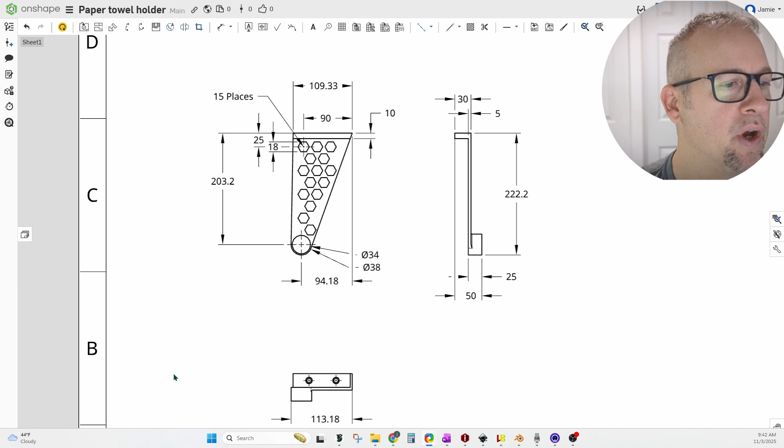And now I will go back to the Part Studio. So now let's create a brand new OnShape document. So I have my OnShape open now. I'm using the free subscription. We're going to go to Create. We're going to go to Document. We're going to type in paper towel holder. And we're going to add just a 1 to this.

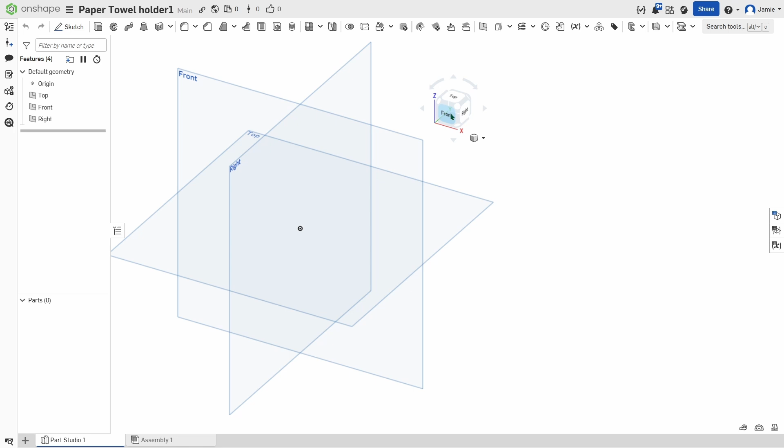Now I'm going to take this WCS, the work coordinate system, pull it in, and let's click on front. And we can click and drag this around if we want to. So now basic principles of the mouse: middle mouse button does the pan, right mouse button does a rotation, and left mouse button does the selections.

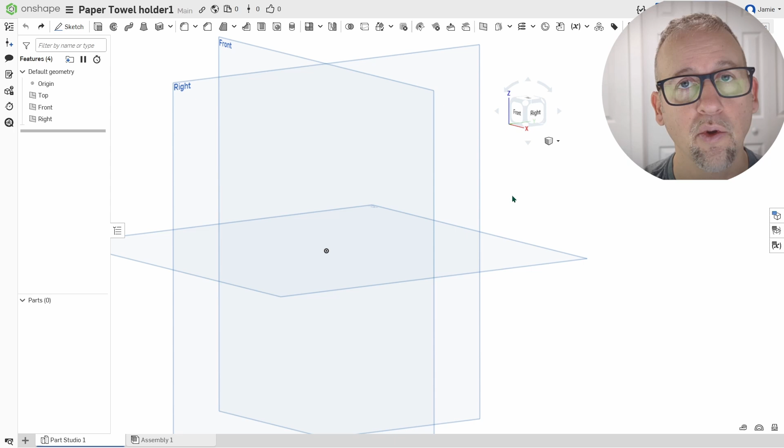We can hit Y to get out of selections, or hit Y to hide things, and so I'm going to Control Z that and undo that. That's the same as going over here and hitting this undo.

Okay, so let's go to our front plane. Let's start with our general shape. We're going to go from this origin right here. This origin is going to go to every point.

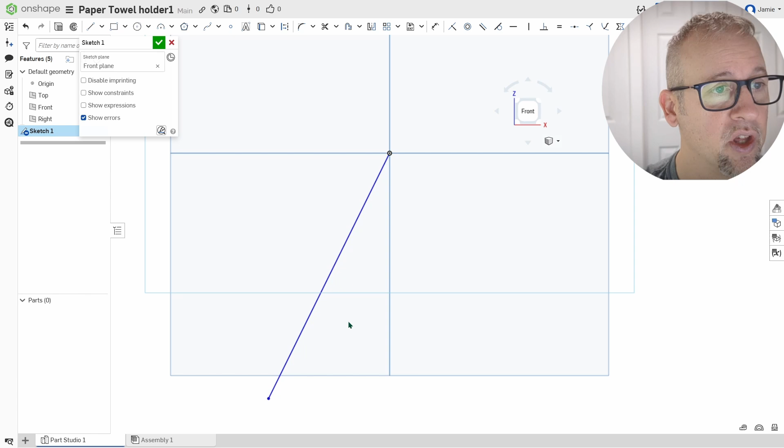So we will go with a sketch on this plane right here. And now let's just drag a line down here, and we'll create a circle. Hit L to get out of that. So we're going to hit L a lot to get in and out of these lines. And let's build that circle first. So we're going to build this circle here.

It is, the largest one is 38 diameter. So just click on that. And once I built that circle, I typed in 38. So now let's go with a tangent here. So click on tangent, click on that line, click on that circle, and it snaps it to that, okay?

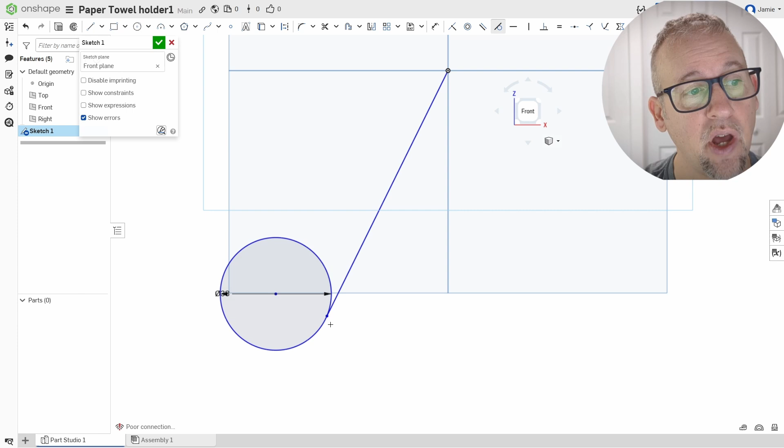So now we're going to build another line from this edge. We're going to build a line straight here, and then straight down. So hit L to get that line, go over here, and we're just going to go here, and then go straight down. And that's saying it's coincident, so I don't want actually coincident. I want it to go a little bit further, and what I'm going to do is get out of that line, hit L, click on that line, click on that guy, and then we're going to hit tangent, and then it snaps it together.

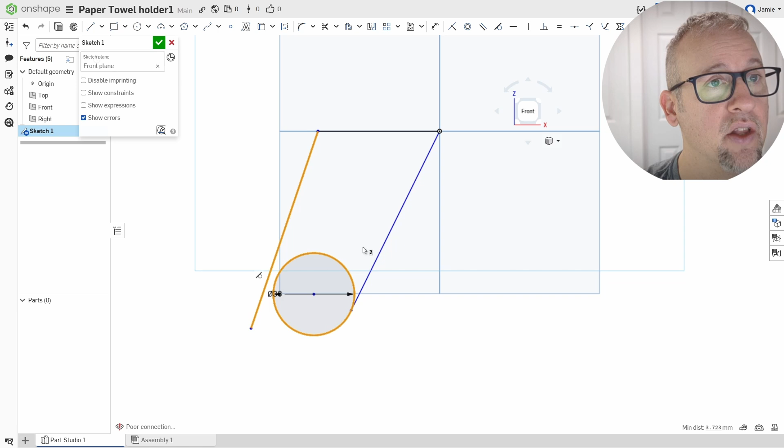Now we're going to hit M for trim. So let's go over, hover over this M, click on that guy, and then just slide over that guy. And slide over this guy if you want. That should not have broke. So something unbroke. Something, when I slid over that with the M, it should not have broke and disappeared.

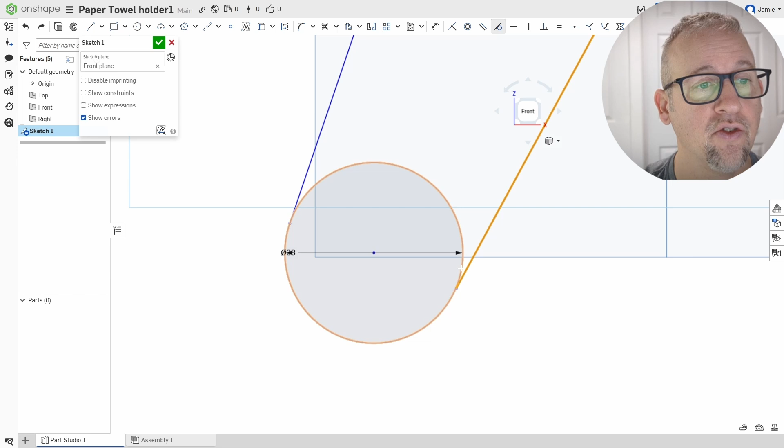So something changed there. So now I'm going to go reconnect that tangent. So this tangent to this, it's not working. It is already tangent, but unfortunately it's not touching. So I have to extend it. So let's go over here to extend right here. We're going to hit X for the shortcut. Click on this guy and then just pull it to there and extend it. Okay, so now we can see this turn gray.

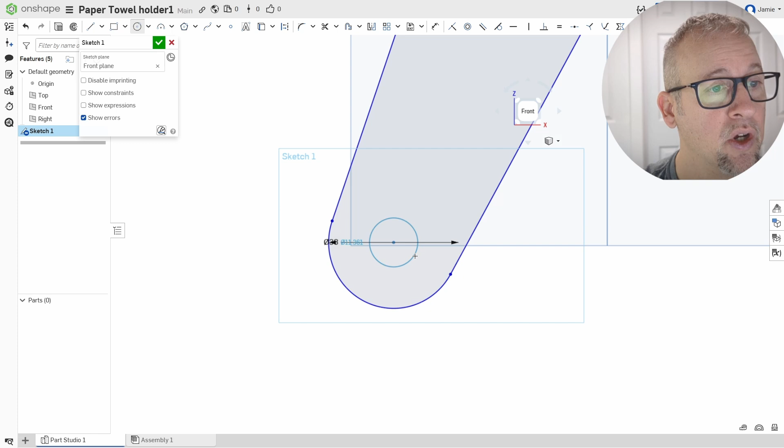So that means it could be an extrudable shape. So now I'm going to hit my M and trim that guy. All right, so now we have our outside size. We're going to choose our inside size now, and that is 34. So just click outside of the hit, type in 34. It automatically jumps into there.

Okay, now we want to check this overall size. So from, we're going to go over here to dimension, D for dimension. Click that guy, click here, and this one is going to be 109.33.

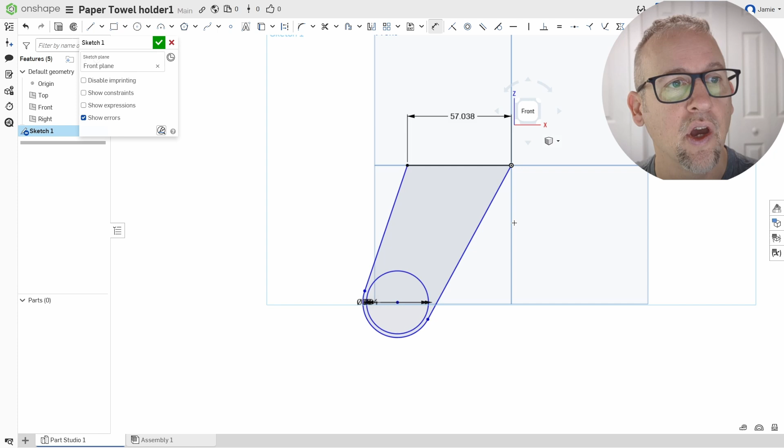109.33. Okay, so now we're going to fix this guy. This is 94.18. So go over here, 94.18.

Okay, and then let's fix this one. I think this one was, I don't actually have that, but I'm pretty sure it was a 20 degree. So I'm going to create a line going straight down. Let me click on this guy right here, go straight down.

And that's kind of like just a reference line. L to get out of that. And let's click on this guy, or let's go create a dimension actually from this guy to this guy. And we're going to type in 20, so that then pulls it way down.

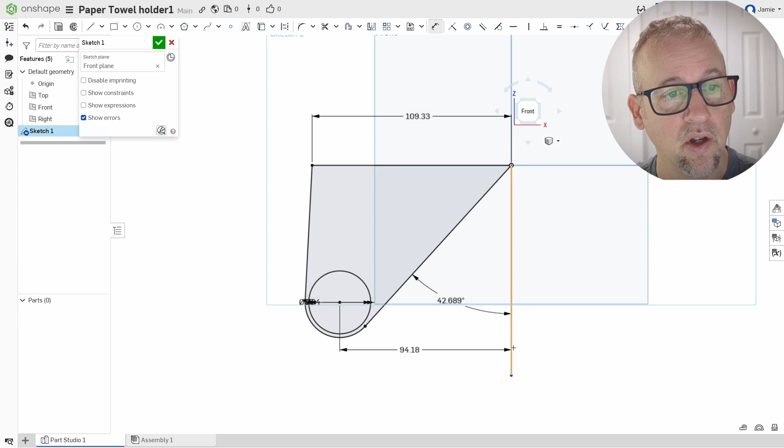All right, so now I'm going to hit, we're already in dimension. So click this guy, and we're going to go down. And that's going to be 203.20, which is exactly what it is.

Perfect. All right, so if we want more slant on this, we can take this and we can pull this in and slant it a little more. I think that's the general shape we want.

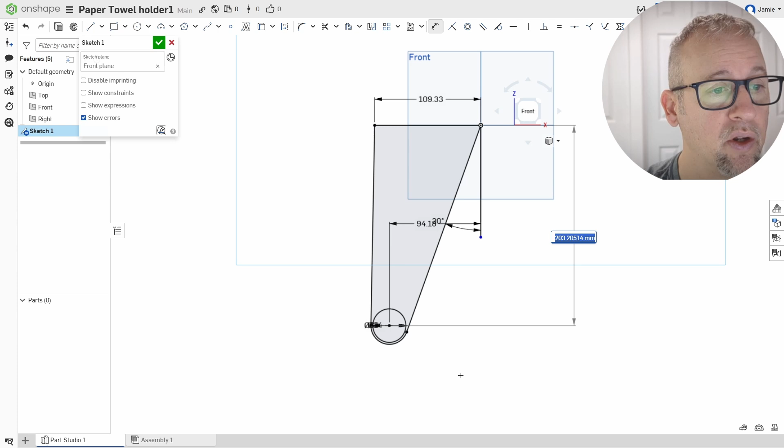I actually do want a full circle here, so to pull that out in a second extrude. So I'm going to re-establish, or I'm going to put that 38 back into there. So let's click on that circle, click here, click just anywhere, and then 38 on that, and then it builds that into there. So what I'm going to do is extrude this circle out a second time.

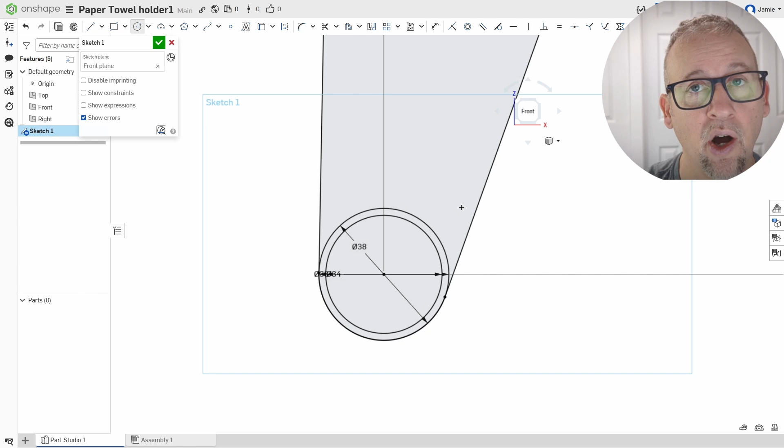So now we have the general shape of this. So let's go and click this green check now. I'm just going to quickly double check things. Okay, yeah, it looks good.

All right, so let's go and extrude this. So go over here to extrude. We're going to click on that guy, and we're going to click on this guy right here, and we're going to extrude this entire thing 25 millimeters. Okay, so 25 millimeters thick.

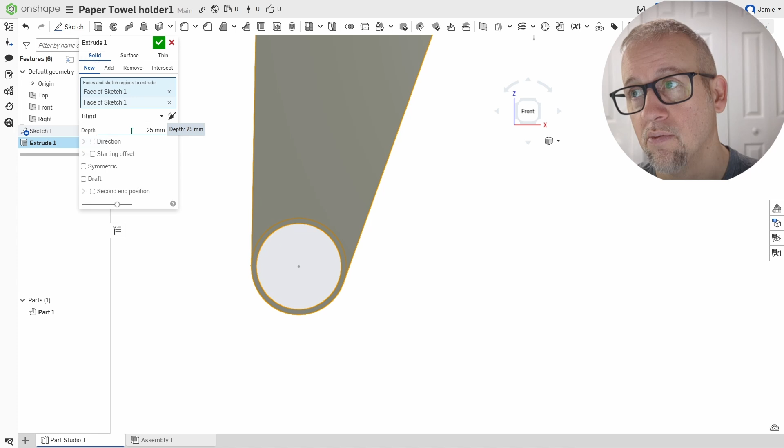So now my sketch disappeared, so I just go over here to this little eyeball and click that little eyeball. Okay.

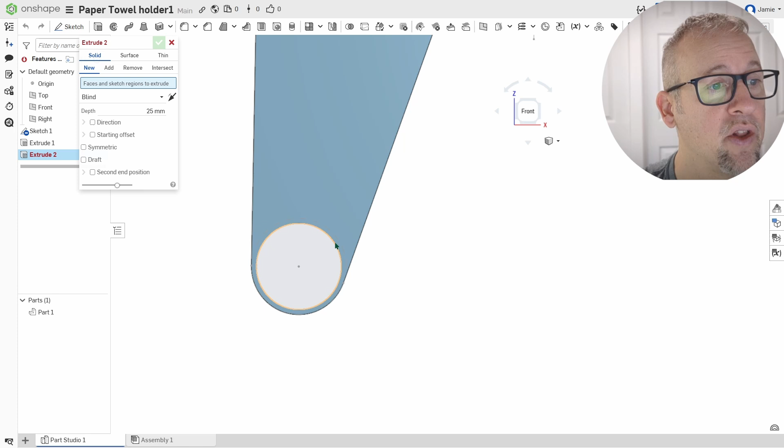All right, so now there should be, you can see slightly inside of there, there's a second line inside of there. So let's click extrude again. We're going to click on that guy right there. If you don't see that guy, we can hit our tilde key. Tilde allows us to select different things that are unseen. So face of sketch 1, there we go.

And it's red. Red means it's having an error. So what I'll do is, why did it change it? Well, it's 25. So there's an issue going on, but it's okay. We'll fix it in a second.

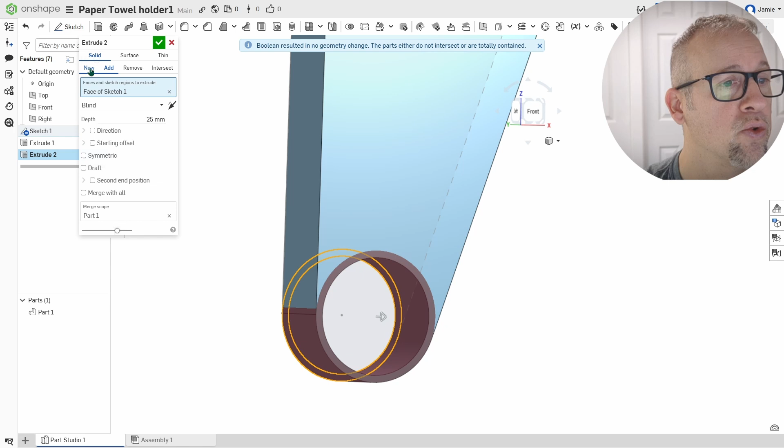So what we're going to do is we're going to create a new, and we're going to have this here, length of that is 25 truly. Okay, so we can keep that at 25, but it's a new, so solid new 25, green check.

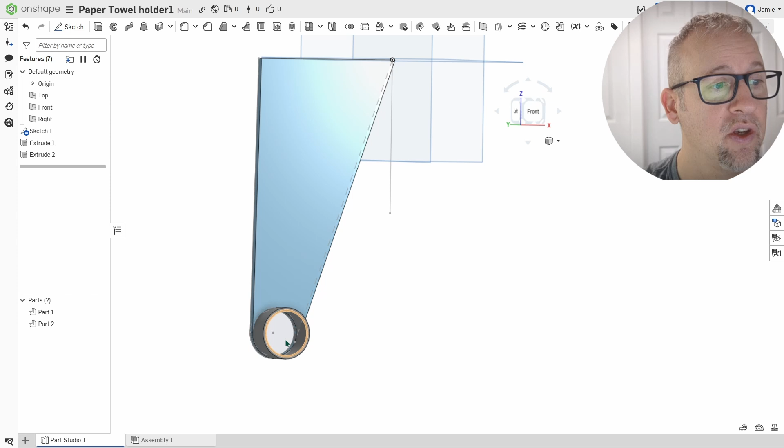So what I actually want to do is I want to push this to the other side because this will be hidden. So let's go to the extrude, double click on that guy. We're going to flip this, and now we can see that it is 25 from this face right here.

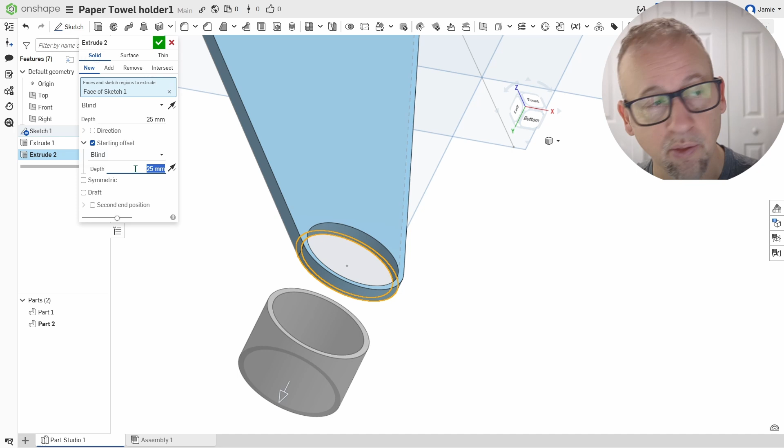So we can do a starting offset, flip that guy, and we're going to do 5 millimeters in the opposite direction. So let's click that, and it resets us it back inside of there. So green check. Now we can do a union. We can add this all together. So Boolean, union this guy to this guy, green check, and there we are.

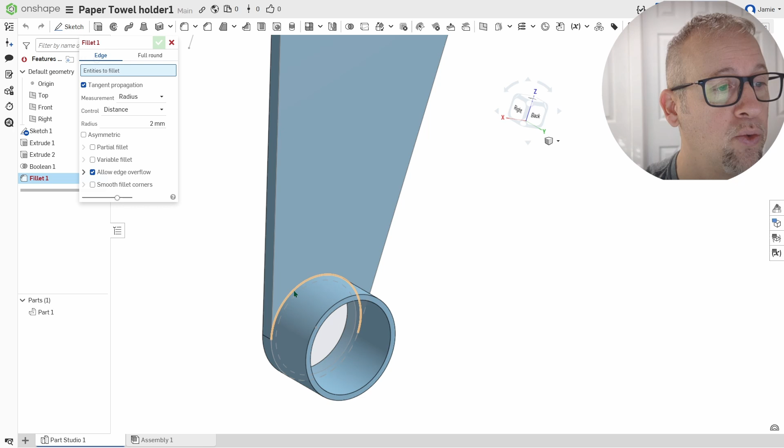So now we may want to put a radius on here. I don't think I put down what the radius is, so we'll just, it's not on the drafting. So I will just put in here like, yeah, 2 millimeters sounds great.

Perfect. All right, and then we'll flip it over. So you'll have to screw this down or bolt it down, and it's going to be on this face right here. So we're going to extrude a surface off of this.

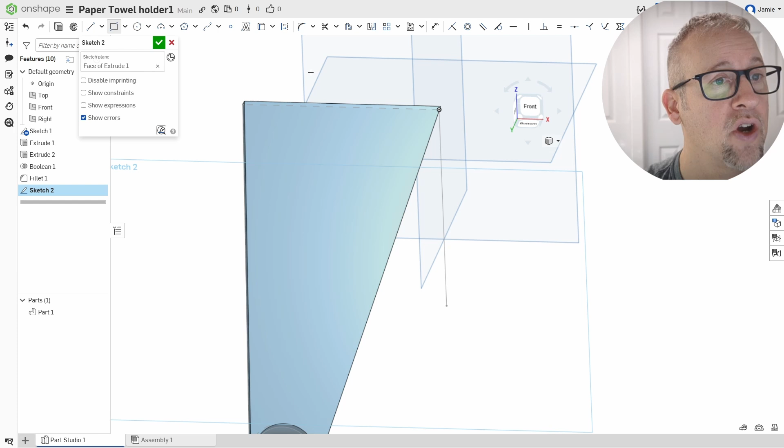So let's click on sketch. We're going to sketch on this surface right here, and let's create a triangle, or let's create a rectangle. Click on this top edge right here, and then we're going to click way over here. We're just going to throw in a rectangle in there.

Let's click front to flatten it. Let's get D for dimension, and now we're going to dimension this here from here to here. Actually, what we can do is we can trim that, but I'll do a D for dimension.

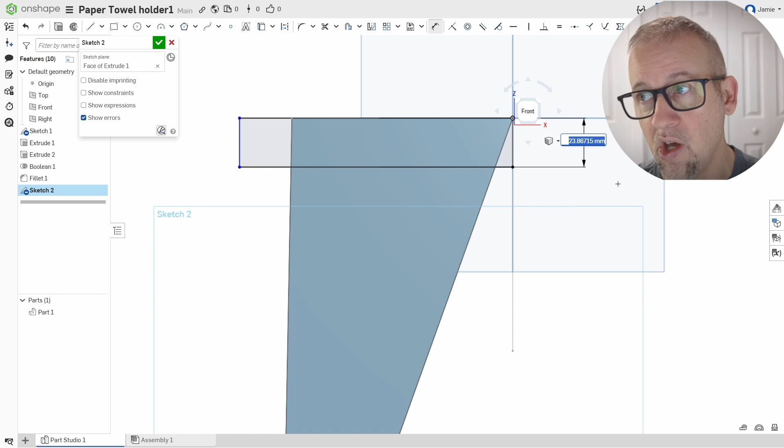We're going to click from this face to that face, and that's going to be 15 millimeters. Okay, and then we can take this, we can drag it all the way over. Let me get out of dimension first. Click out of that. Now we can take this and drag it.

All right, and now what I actually want to do is a projection. I want to project this line onto the sketch. Now I'm going to hit M for trim, so M for trim is right here, and then just draw a line right through those, and they disappear.

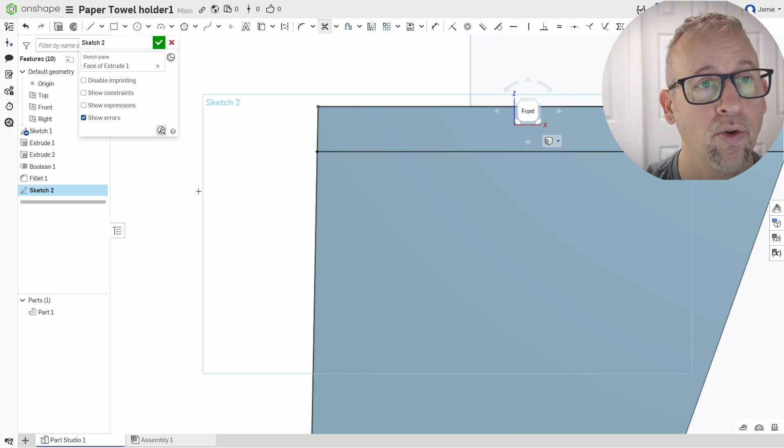And then this guy right here, I will do a use, so it's going to project this line right here. Let's hit M for trim that guy, trim. Okay, and there we are.

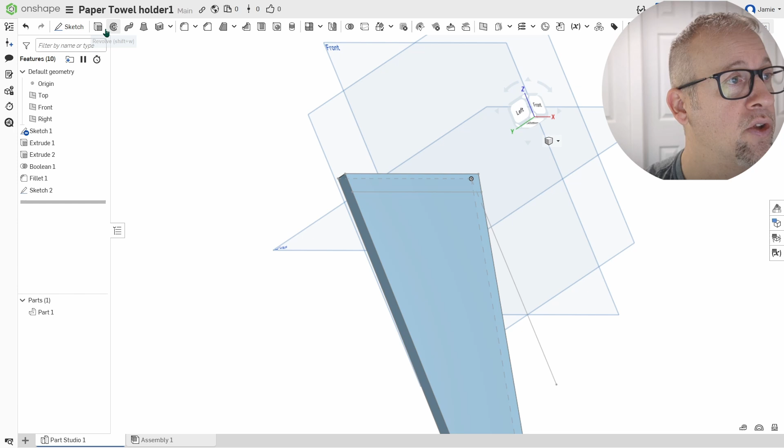Green check, we can finish that one, and we're going to extrude this one 30 millimeters. So 30 millimeters, but it's going to include this 5 millimeters, so it's actually only 25 millimeters. So let's go extrude that guy, 25, perfect. It's going to do solid, add, and it's merging with part 1, which is the main body. So that's perfect, green check.

All right, so now we can put in our holes in here. I don't have that on our drafting, but we definitely need some holes in there. But now we're going to do the hex pattern, and the hex pattern is probably easier than you think.

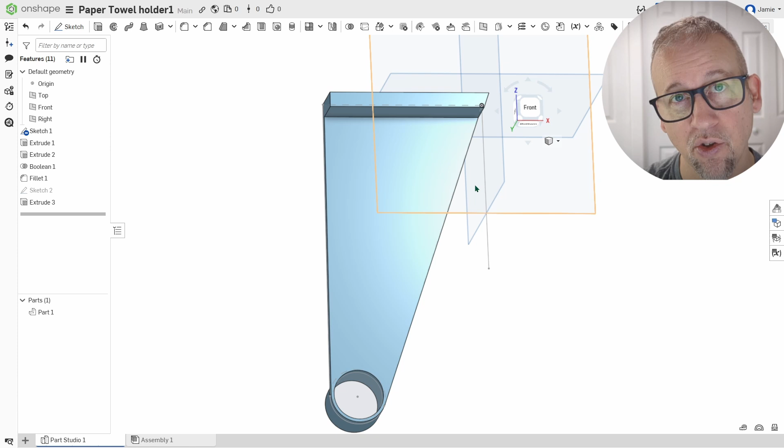So let's create a sketch on this surface right here, and let's create our hex pattern. So go over here to inscribed polygon. We're just going to click on there. We're going to click here, and we're just going to drag out a polygon, and we want to choose 6 sides.

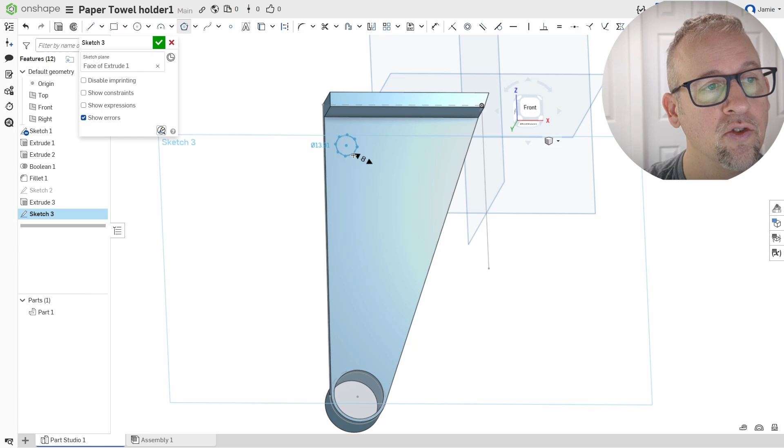The first sides is going to be 8, but if you slowly drag this to the left or right, it decreases or increases. So I'm going to just go to 6, and then I'm going to get out of that and go to my dimension here. I'm going to click on that inner circle right there, drag that out, and I'm going to change this to, I think it was 18.

Yes, 18. All right. So then I want to take this line right here, and for mine, I want to make it horizontal. So let's click on that line right there, and then go over here to horizontal, and it snaps at horizontal. Okay.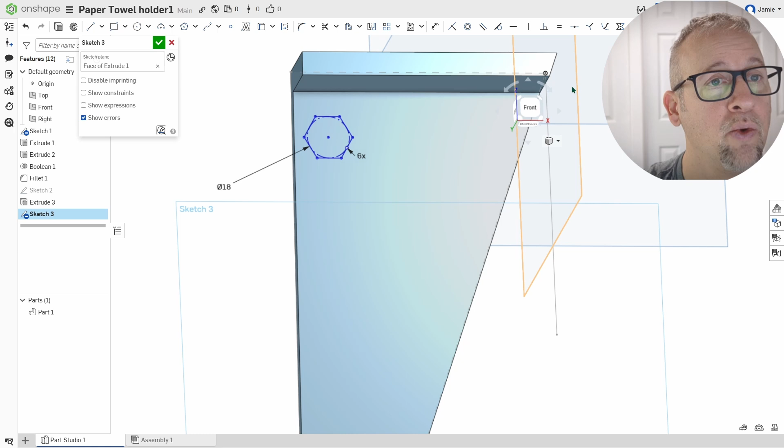So next we will do a dimension. We'll dimension this first one. We'll take it from the origin, so all the way - oh, actually it doesn't look like it wants me to take it there. So I'll take it from here, which is just slightly above the origin. Click over there, drag a straight line. This is going to be 90.

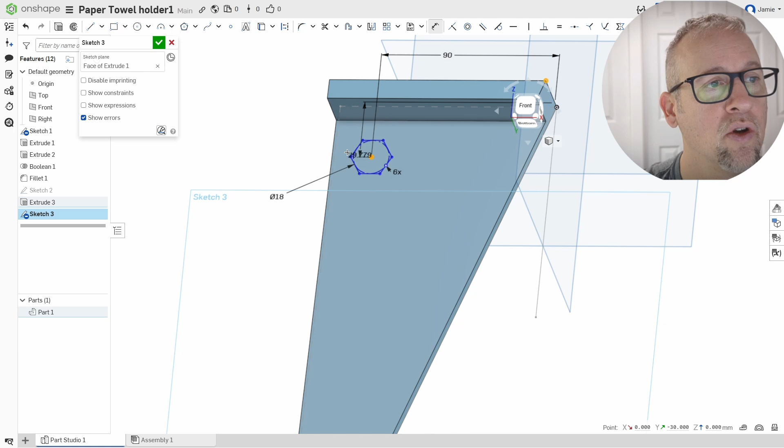And then going down, we're going to do 25 millimeters from this to here. 25, enter. That's our first polygon. So green check to finish that guy. Let's go over to extrude.

We're going to take this shape right here and extrude it through. So we're going to do solid, remove, and it doesn't matter how thick it is, as long as 25 is thicker than this thickness, which it is, and it's merging with part 1. Perfect, green check, and there we are.

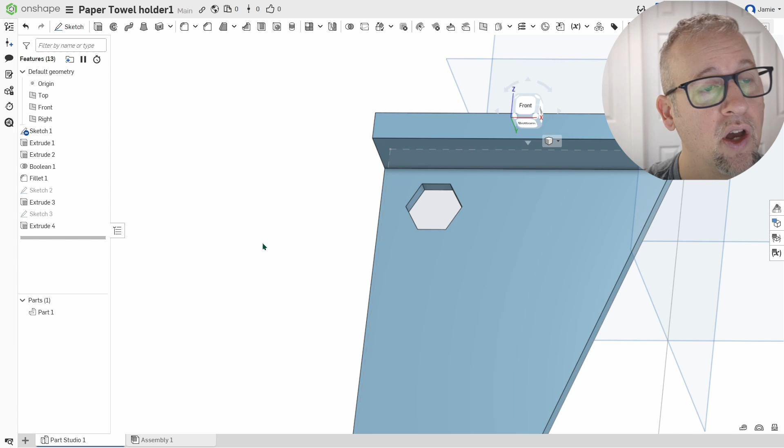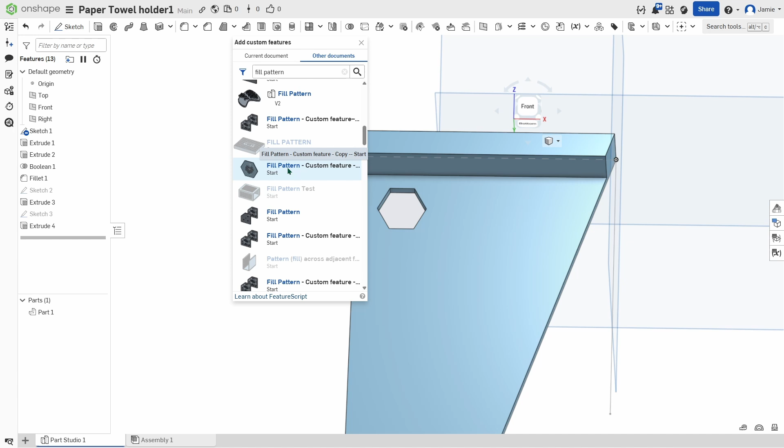That's our first hex or polygon. All right, so now what I'm going to do is go to fill pattern. If you don't have it already, we're going to look for the identical one I had. Yep, that's it right there.

So we want to look for fill pattern, and the icon looks like this, okay? Now we go over here to our custom variables and features that we have. We're going to click on that fill pattern.

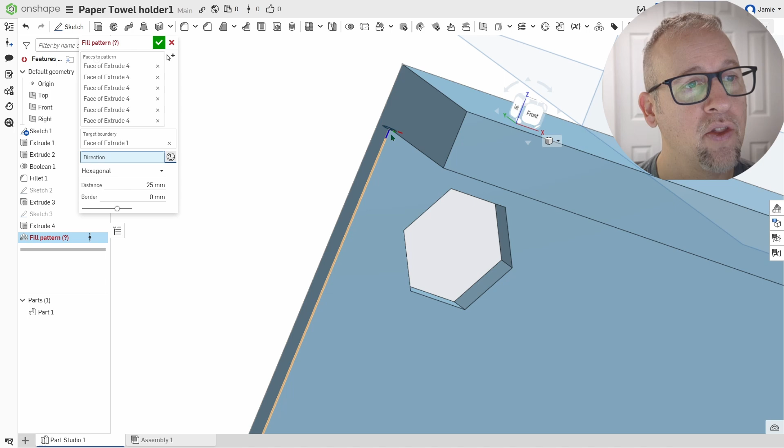We're going to click on the faces to pattern, which is this, and we're going to do hexagonal, and we're going to click on each one of these hex faces. Okay, green, or not green check yet. Then we're going to choose the target boundary, which is this face right here, and then direction. We're going to choose this guy right here, select the mate connector, and we're going to click on this face right here. Okay, and you see it automatically populated, which is awesome.

See how easy that was? Click on the front, and we notice that a few of these are not showing up, and this one's really, really close. So what we probably should do is go down through this list here and get rid of that one right there, or we can go in and make like a radius or something on there, but it says there's 16 pieces that it made in there.

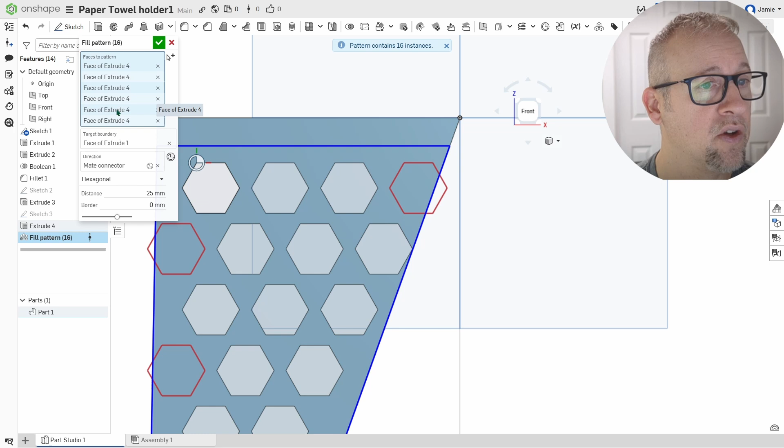Let's click on these... not letting me choose anything. I'll do a green check. So now we see the pattern, and we notice this one is rather close.

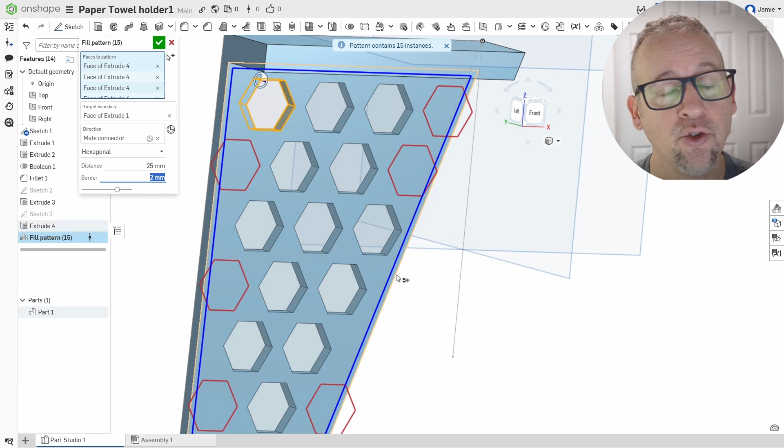Let's create a border so it stays out of this area. Double click on that again, go over here, click on 2, and that makes this one disappear because it's too close to the edge. Green check to get rid of that.

On my original one, we had it in 15 places. So we can pop a couple screw holes in here, or in my case I was using command Velcro strips so I can easily attach and detach this. I'm going to leave the holes out for now.

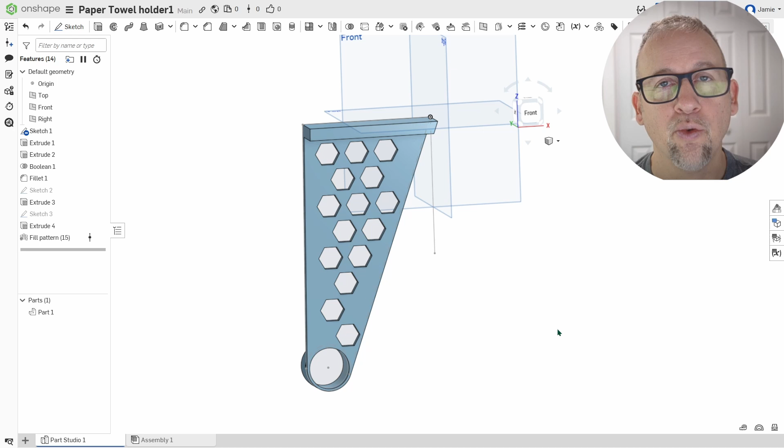So now what we want to do is export this out as an STL, and we want to print 2 copies of it, and we actually want to have a mirrored copy of this.

We're going to go over here to mirror, grab our entity to mirror, mirror about a plane, and choose this plane right here. We're going to do a new, not add. So new, green check. Now we have 2 bodies.

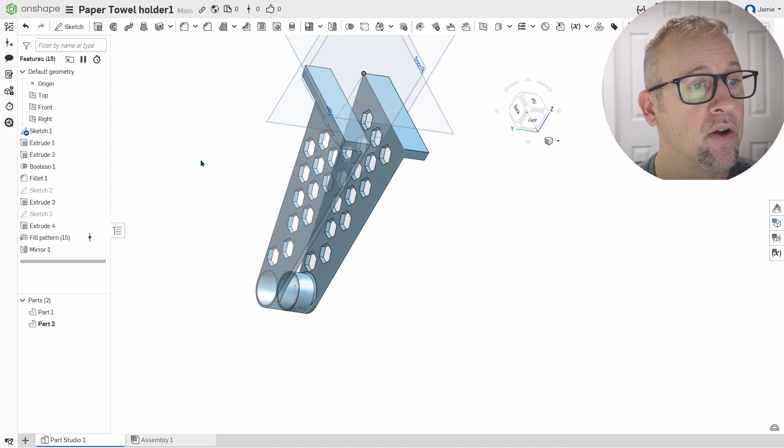This will be your left one to hold your roll, and this will be your right one to hold your roll. You can always adjust the size of your roll right there.

So then we will export both of these out, but one at a time. This would be my right one. Let me left click, right click, do export, and we're going to call this right paper towel holder.

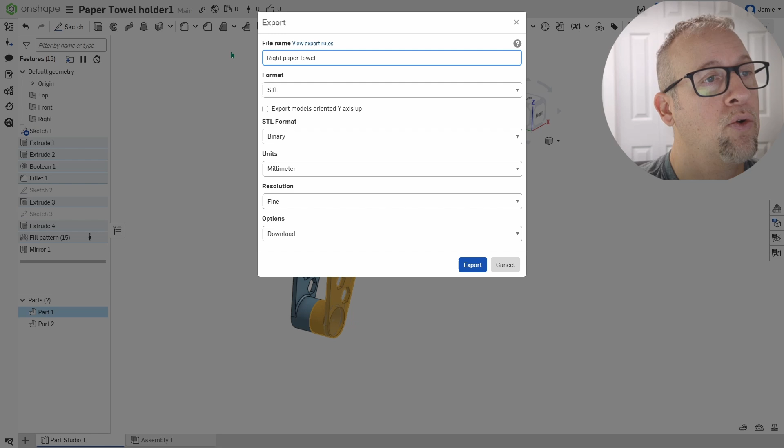I'm going to copy that and make it quicker on the left. Export that out. Now go over to part 2, right click on that guy, export. Oh, I think part 1 was still highlighted there. Let's click on part 2 only, right click, export.

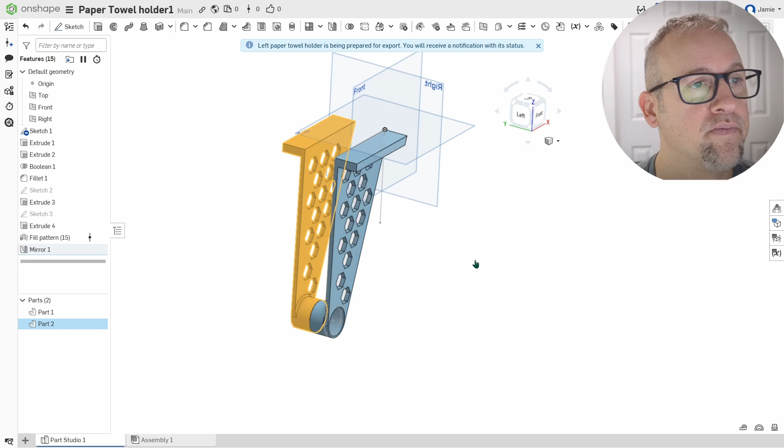Now we're going to type that in, and this is going to be our left. I'm just going to change that. Export. Now we're going to go to our slicing software.

So now we're in our slicing software. We will go to our downloads, and I will slide in the left. Okay, looks a little big.

Let's see if it will fit. I think it's going to just barely fit. So let me flip this over. Let's click on, put on that face right there. Looks like it's going to print okay.

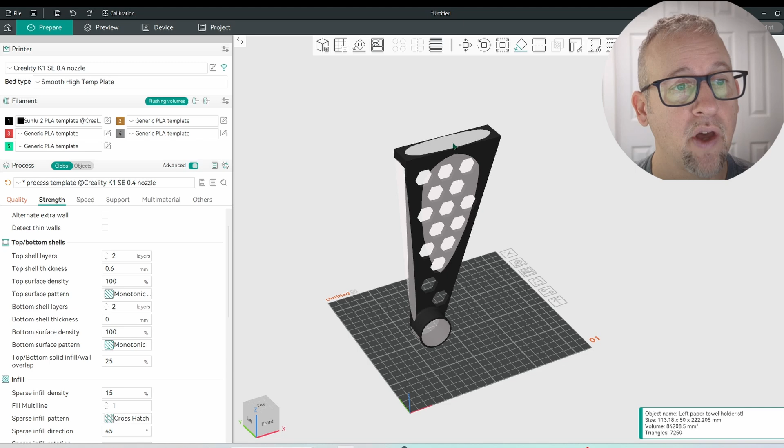If I laid it down, it's not going to fit on my build bed. So that's okay, I'm going to slide in my right one. Let's grab that one and do a flip on it. Let's pull it out, and we're going to do a flip on that.

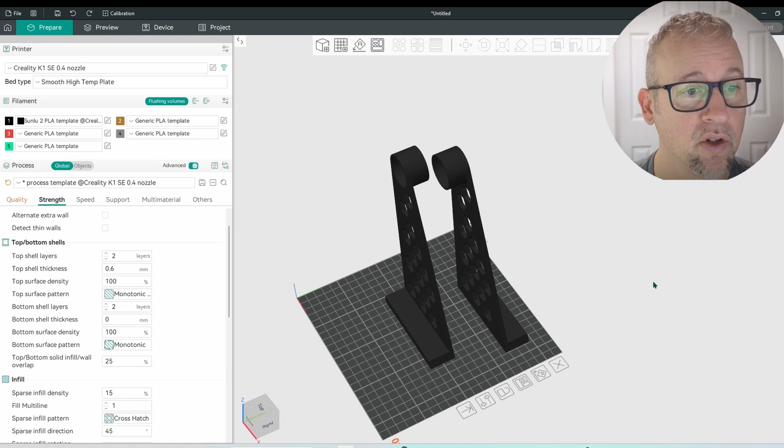So click on that guy, face this guy, click out of there, and those are the 2 pieces. I can move this around a little bit, and let's do a slice on that.

This will take 3 hours and 27 minutes with my printer. I have an infill of 15%, and we can take a look and see how well that's going to print.

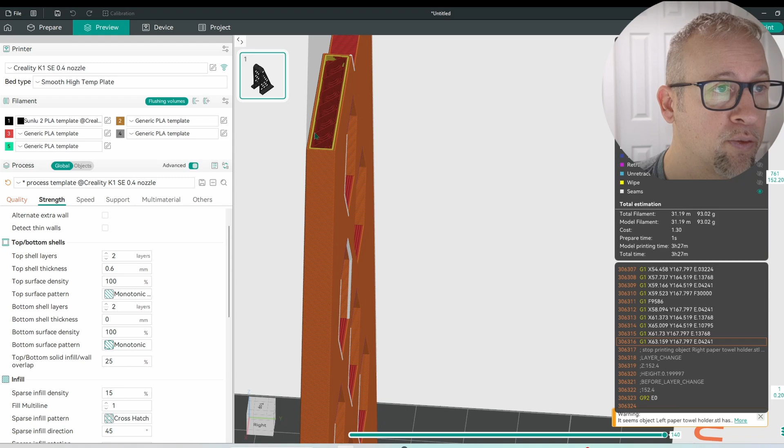Looks pretty good. I don't believe we'll need any supports.

Let me take a look at how the hex pattern is hitting. Yeah, the hex pattern, these will be maybe a little difficult, but I think it should be okay.

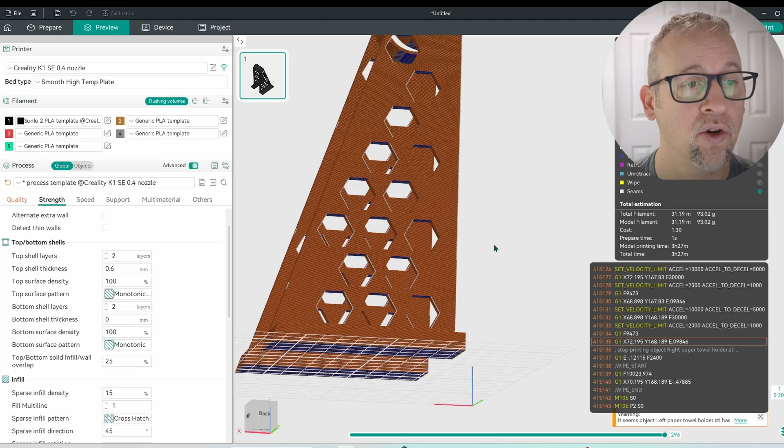You may want to print these one at a time and see how these hex patterns actually work, because they are overhangs. They're short overhangs, but they're still overhangs. And then you have an overhang right here. So it's going to look maybe a little goofy there, but I think it'll print just fine.

So maybe print one at a time, see if it fails. I'm going to actually click on one of these and get rid of it. Go back to prepare, click on that guy, delete. I'm just going to print number 1 and see how that works.

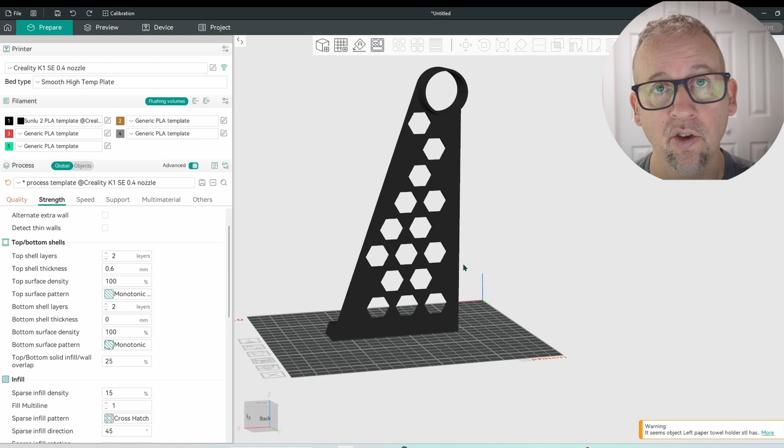If you want to do a real basic test, maybe you chop this at a certain level and then print that to see how the hexes are printing. That will give you a good idea if you need to rotate those hexes. You could change it to where the hex's point starts on the bottom. That's one thing to do.